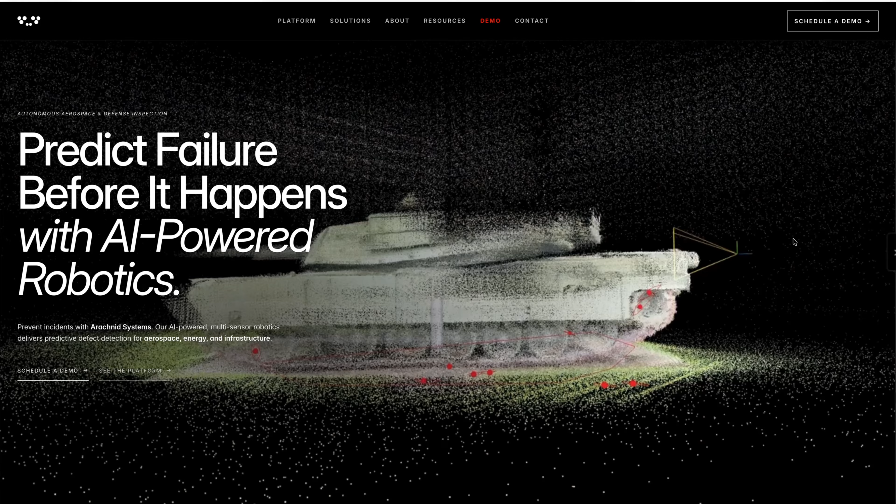We're building AI-powered robotic inspection technology to find defects faster and more consistently. Aerospace maintenance and manufacturing are still plagued by slow manual processes that lead to huge bottlenecks.

Having worked at Lockheed Martin and JPL, and talking to other aerospace companies in El Segundo, we have collected intel that this is still a problem yet to be solved. Arachnid solves this problem using our own proprietary software and hardware.

While working at Apple, I saw firsthand how we solved the supply chain bottleneck with distributed data collection. This proactive pipeline we developed is the solution for industries in aerospace where the work right now is reactive.

At Arachnid, I work on product and AI, turning inspection data into models that detect and track surface and subsurface defects. I'm the CEO, and I work on making our roadmap align with our customer pipeline, and also work with clients to make sure our workflow meets their demands.

We're starting with aerospace first, but this problem goes far beyond aircraft. We see our technology helping inspect other safety-critical assets, including launch pads, ships, buildings, and infrastructure.

We have collected data from all these sources, built a synthetic training pipeline, and have a working prototype. Our long-term vision is to create a health monitoring system for physical infrastructure capable of diagnosing, reporting, and supplying the aerospace industry. We want to turn flashlights and guesswork into an assessment with a part number just a click away.

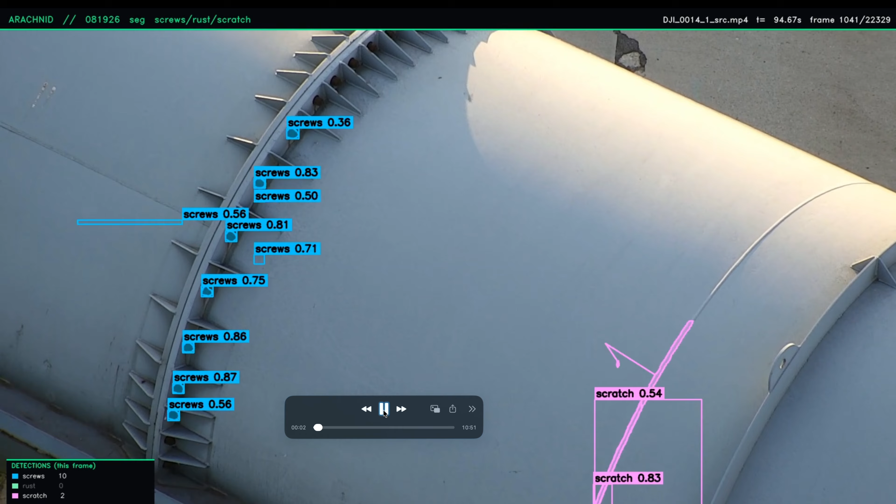So here you can see a live video of our model working on a drone. This is something that we will be making autonomous, to actually collect these samples. I'm going to show you in just a little bit how this data is processed and how it actually shows up to people on the ground.

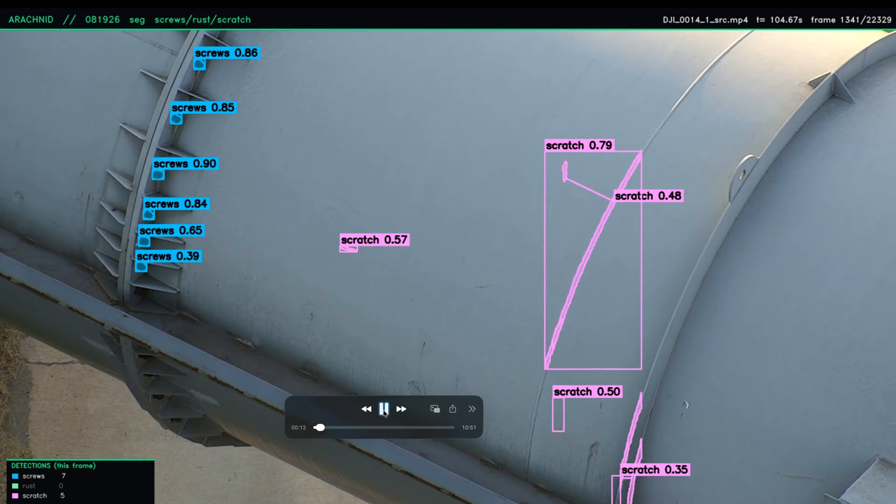This is our current progression right now. We have our V1 complete, and I'm going to show you video of this working right now. What it actually does is run any proprietary model that we write to it, but also stream all the data and save it to be processed later on.

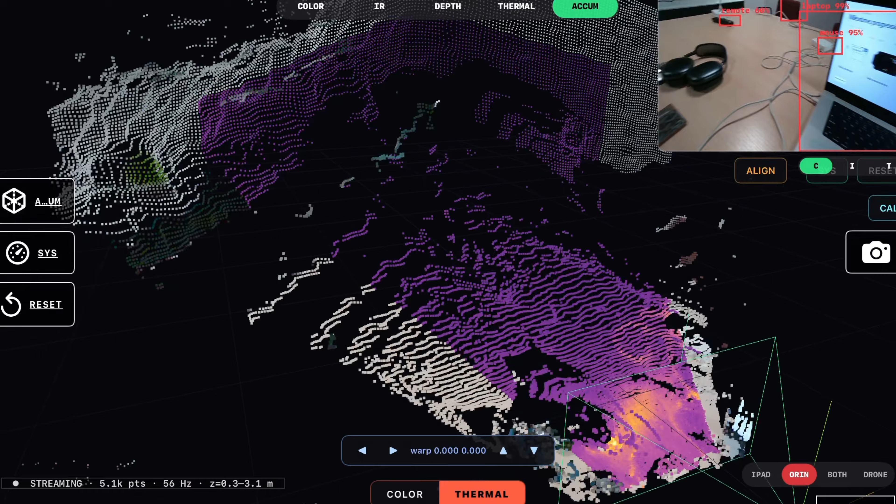So we can actually layer in 3D. This YOLO model is simple, but it lets us get the point across of training a model, having it show up on the feed itself, and actually being able to help people on the ground look at what the defects are, without having to resort to using our system in a larger capacity.

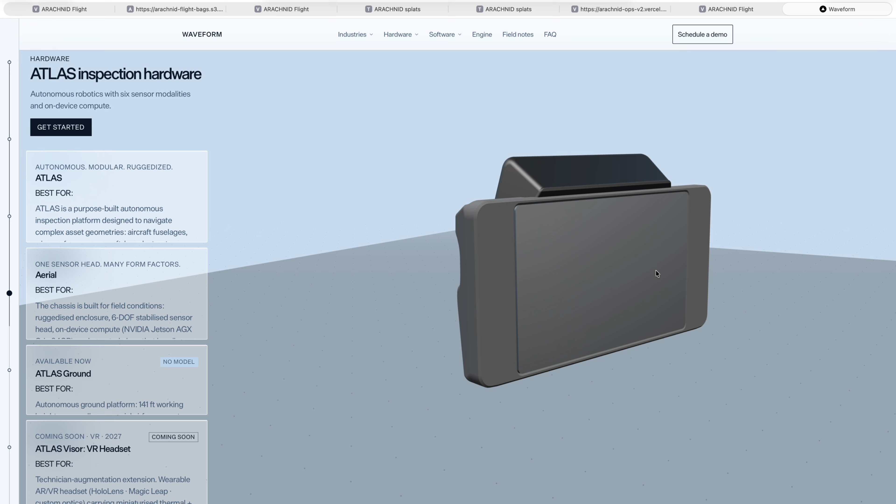Now that we've finished with the iPad, we're going to be moving to a monolithic model that lets us have all the AI, all of the sensors, and all of the rest of the future roadmap for sensors applied into one interface. So this is going to let us control the aircraft, control the fleet, look at reports, having a desktop interface, or having to drive the aircraft themselves.

I'll show you in a little bit how it works here and how it works on a drone, but that's kind of the progression of the different modes we can do to inspect.

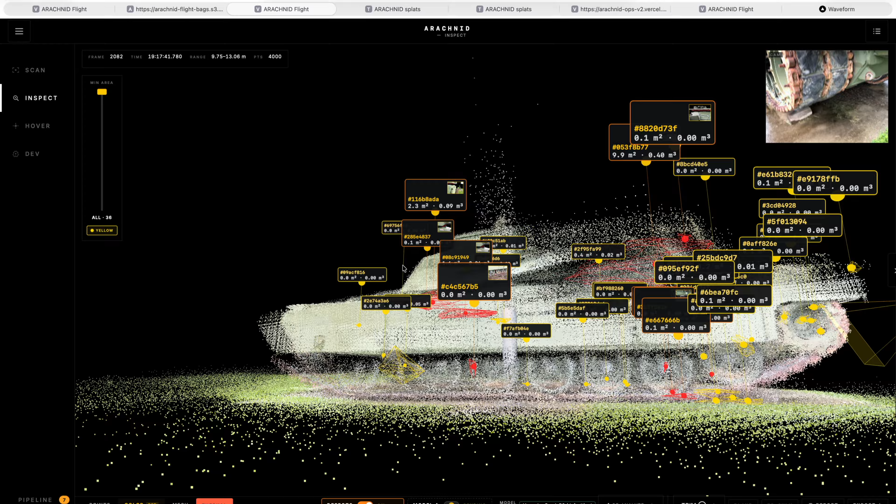And this is our previous version with just the D455. So pairing it with a really high quality camera is actually able to give us a lot more insight. But you can see how much we can pick up even without having that, and we can even tune to the severity of that defect.

And so what we produce is actually detailed visuals of what needs to be looked at and why. We actually compiled that into a PDF here for systems to look at. And then we can actually organize this data to make statistical determinations on defects across an entire fleet, across the history of an aircraft. If an aircraft is leaving an airport and arriving in a different area, how do you check up on a repair that's been done there?

Remember, we do this through the lens of $150,000 per hour. That's how much an airline itself is losing on the ground, and can even be more in a military setting. So for the F-35, their costs and readiness have gone below the threshold. An F-35 is supposed to be 75% ready at any given time, and right now they're hovering at about 45%. So for us, this could be a huge capability increase without them having to increase the manufacturing costs for those parts in the aircraft themselves.

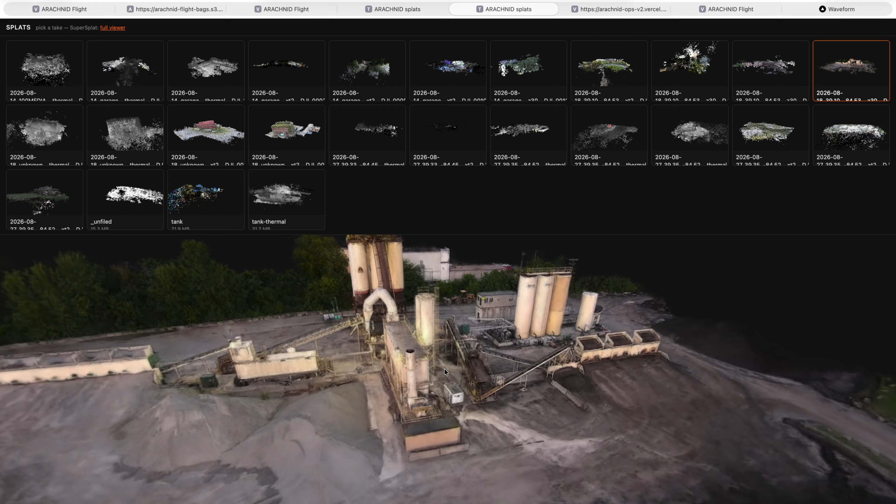So this is the actual interface that we're going to be shipping. This is what it kind of looks like right now. It's basically a demo of all these different use cases compiled into one.

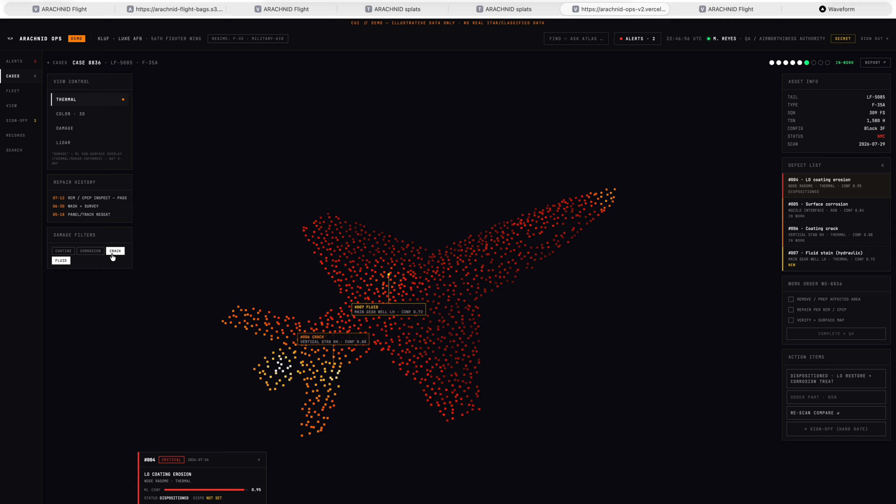So you can see here we have all these different critical alerts on different aircraft that are currently in inspection. We have different modes and different ways to filter through the data that we have and actually do checkups, do assessments, actually complete a pass, and actually send. You can even highlight it to be compared again to do that.

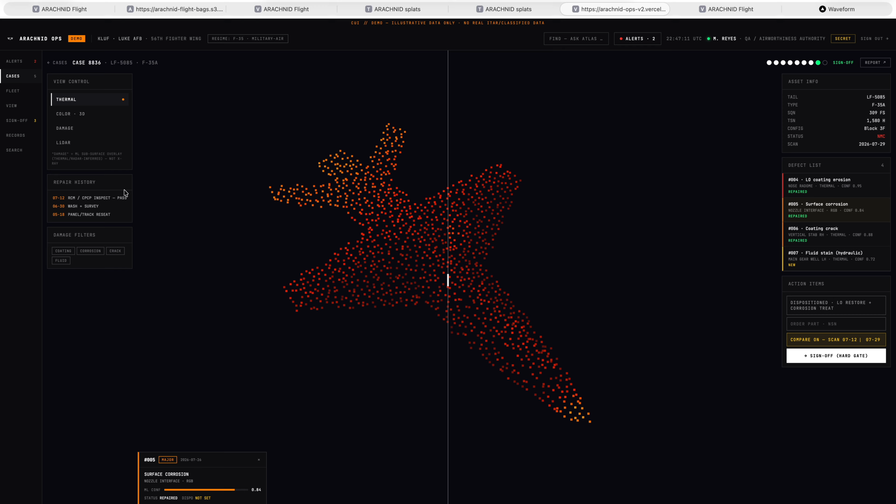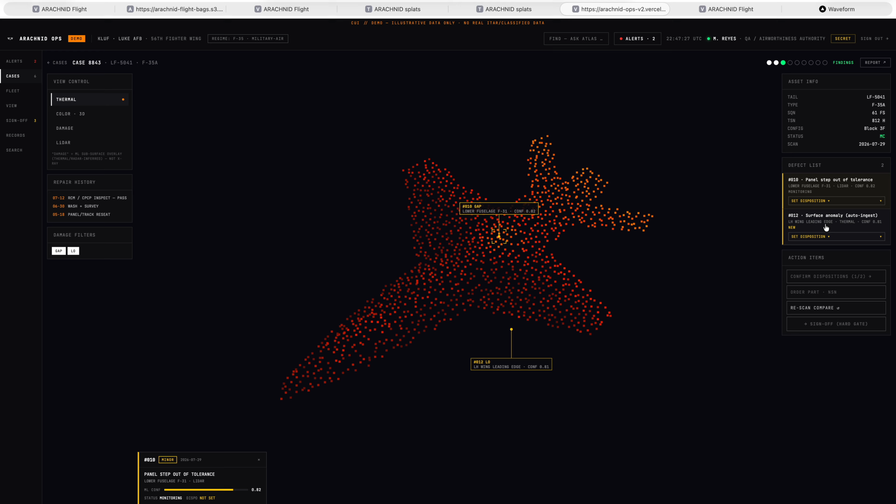We can get into this later, but basically this is going to be letting us browse through different defects, different areas, remotely connect to a drone to do a bespoke inspection on a certain area without having to send someone out to make that really long walk. So you can actually jump right back into what the drone picks up, actually make determinations. You can even move into the records and actually manage the logistics.

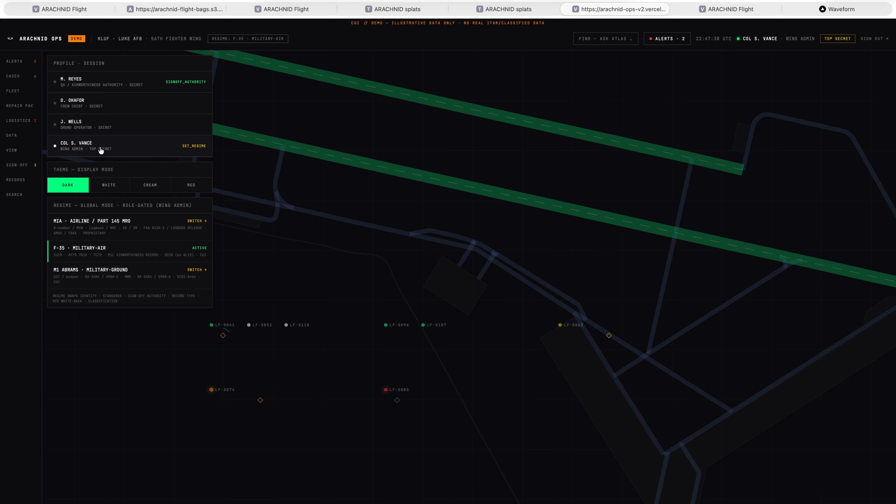So you can see we may change our ranking here. You can actually go into logistics and actually look at the stuff that is coming in, prioritize it, manage the fleet, manage how it's handled. And so we really like the way that we've set this up. This is set up to work with the current naval and Air Force repair statuses.

What we're going to be bringing into this in the next couple months is actually our staging and inspection pathways, so we can actually tell an aircraft how we want it to do the inspection, how to repeat this inspection over and over, how you can train it to do that. And so we've already built that pipeline. We're just weaving it all together to make one giant look.

And so our new hardware here that we're ready to ship is going to be basically this with the hardware for sensing inside, as well as remote wireless secure connection to manage the entire fleet and manage your entire aircraft system. And so we charge for hardware, we charge for the software, and we charge for the actual maintenance of our equipment to be calibrated to FAA specifications. So we hope to get that done within the next 2 months with them.

They're very excited about the record-keeping aspect of it, and they're really passionate about this new side of technology, which is something you really don't see a lot with the FAA. But current status of the maintenance system is just paper records, with just experienced veterans, as opposed to a unified collection system, which they think is a really key feature to ours, and is going to let them move into the new century and be able to actually capture over 30% of lost revenue because they don't have good maintenance records.